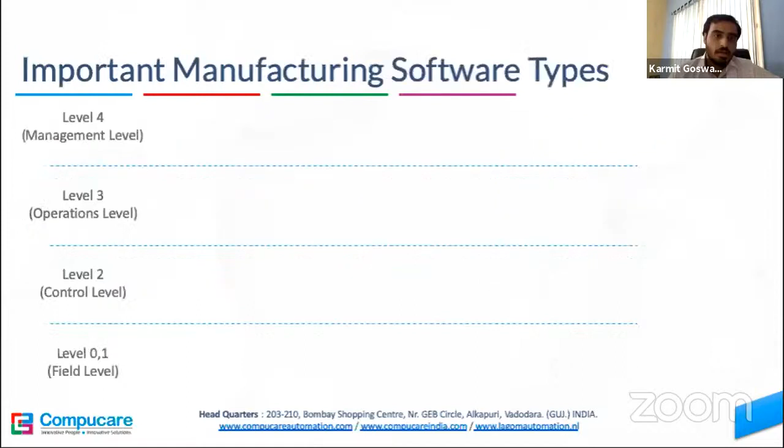If you don't inform your manufacturing plant regarding upcoming orders and stuff like that, the plant cannot meet the targets. Or if there is any new innovation in the market that the plant needs to innovate towards, it's going to be a challenge for the plant. So to take care of this, you have obviously deployed a lot of systems in your plants. I have mentioned a few systems here and divided them into 4 levels.

The bottommost level has your PLCs, controllers, HMIs and stuff like that connected with the machine, as well as some sort of system somewhere sending you the real-time data.

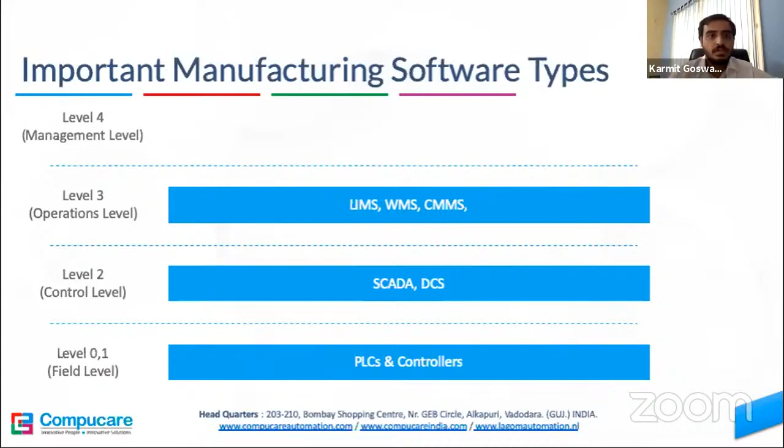The control level. So it goes to the SCADA system. SCADAs and DCS systems take care of all the machines in your plant, and they know the health of each and every machine you have in the plant. Above that, you then have the operations level that is taking care of your inventory, quality, and maintenance parts. And then you have your management levels with your ERPs, CRMs, HRMs, and stuff like that.

So where does a manufacturing execution system fall in this hierarchy? A manufacturing execution system is essentially designed so that it can communicate with the rest of the system. And here's where the manufacturing execution system falls. That is the operations level. So the operations level is generally at the top of a manufacturing plant, and it's directly communicating with ERPs or CRMs and stuff like that to communicate the data to the corporate levels.

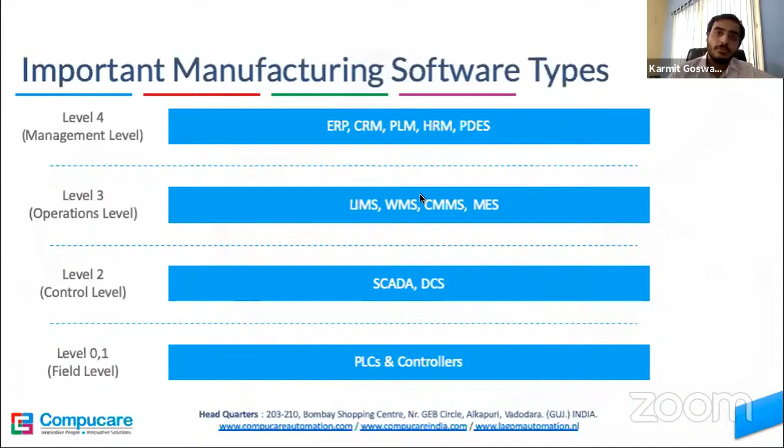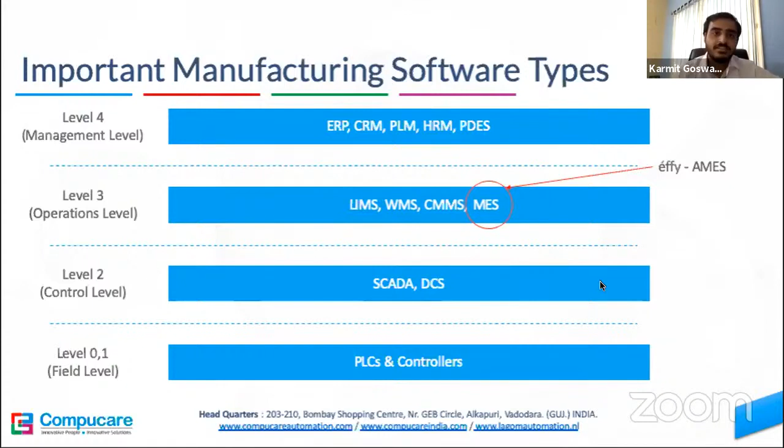So here's where éffy as an MES is designed, or we are innovating over here. And so let me first discuss how an MES is communicating with the rest of the systems in a manufacturing facility. For a fourth level system, a manufacturing execution system communicates with ERPs for production data, with CRMs for tracking and tracing data, PLMs for work instructions, and human resource management software to know what is the performance of their people in terms of production, or how efficiently they are working on the line.

With the sister softwares, I'd say, on the shop floor, on the operations level, the manufacturing execution system has a responsibility to communicate with the quality management systems, that is laboratory information management systems, or inventory systems, that is warehouse management systems, and maintenance systems. So the manufacturing execution system has a very, very important role when it comes to giving you a right picture of your whole manufacturing plant.

And this is what we are already doing, but there's this next thing that comes when it comes to éffy. This is where éffy is differentiated from a regular MES. We communicate directly with the machines on the shop floor. So éffy was designed keeping in mind IIoT. Manufacturing execution systems have been around for over 15 years now, but IIoT is extensively being used since the last 5 to 10 years.

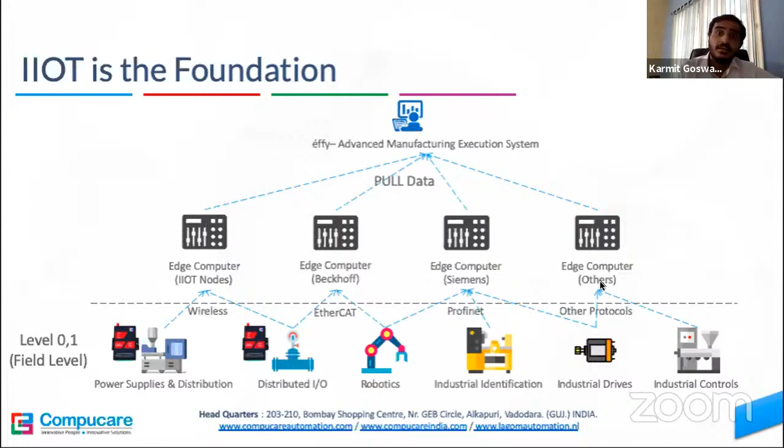And with all this data, it's focusing on one very important factor, and that is improving your OEE, your overall equipment effectiveness. This number, OEE, is based on three foundational blocks: availability, performance, and quality. If you have enough availability of your machines, they are performing at the best level of performance they can, and they are producing products without any rejections, your plant is probably having a very high rate of OEE.

And éffy is improving each of these fundamental blocks by reducing 6 losses. These losses are your unplanned or planned stops on the machines for maintenance or breakdowns and stuff like that, or small stops or slow cycle times. That is your machine idling. Somebody was just taking a break or something, because of which the machine was idling. Or there are a lot of rejections coming out of the machines. These things are being addressed by éffy to improve your OEE, and that's the focus of the whole system over here.

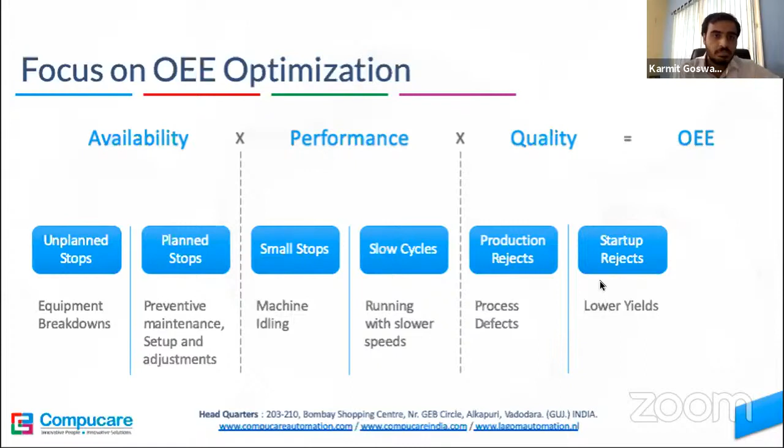Let's see how many modules éffy has to address these fundamental blocks. It is built on 6 pillars. These can function on behalf of other systems that we talked about as well. So for example, there is a production monitoring system, and a maintenance management system, which can work on behalf of a computerized maintenance management system.

The quality management system can work on behalf of laboratory information management system. There's utility monitoring system, product tracking and tracing, which can cater directly to your CRMs, and you have at the end product process digitization. So anything that is going on in terms of paperwork or manual tasks on the shop floor, these can be digitized directly and be communicated directly to and from the corporate houses of your manufacturing plants.

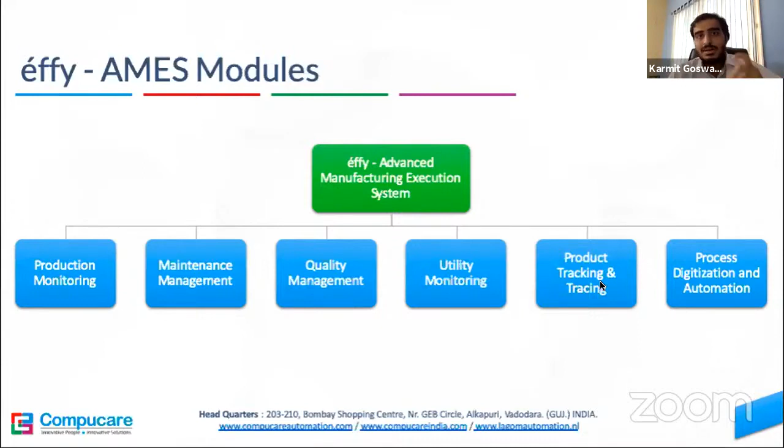So let me show you one by one each of these modules, how they work. So first of all, production monitoring system. It is focusing on 2 major factors, and that is monitoring of whatever production that is being done on the shop floor, and the other part is the order scheduling. So it makes sure that you know what is the targeted production at any given point, and this can be directly transmitted to the workers as well on the shop floor.

They need to know what is the actual production targets. So we can give them as well as the order planner a view of which orders are being executed on time, which targets are not being met in production or something like that, so that they can go ahead and schedule the next orders coming up in the queue, and they know exactly which orders could be delayed at any given point.

In parallel, it also gives the data about machine status and how the machine is performing, and what quality of products it's giving out. So this will indeed help manufacturers improve their OEE percentage. And of course, at the end, waste monitoring.

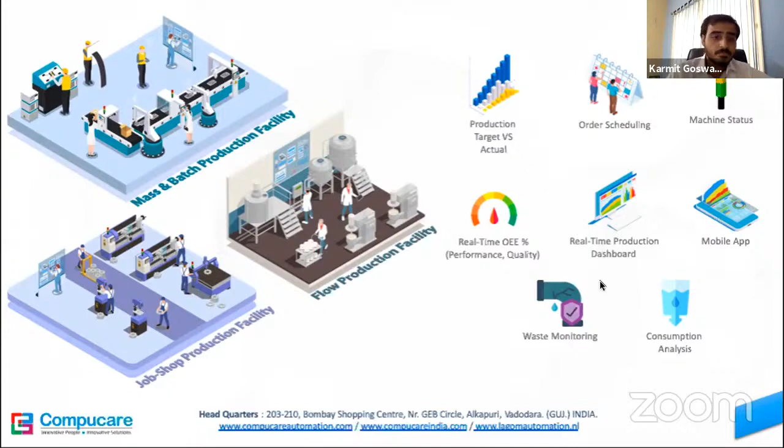Next is maintenance management. It has 3 parts: andon system, condition monitoring, and preventive maintenance. So the andon system and condition monitoring are 2 very interesting parts for machine maintenance. So how does an andon system work? It makes sure that it addresses any maintenance problems or any type of problems. It could be something like the operator does not have material with them on the workstation. This could be a problem that is causing breakdowns or machine stoppages.

So these things that are external to a machine, the machine has no problem, but there are other external factors that are causing the machine not to work. These things can be controlled using an andon system, whereas condition monitoring is keeping a track of everything that is going on inside the machine. It could be something like vibrations are too high, or temperature is too high, or there are slower cycle times due to some stoppages or problems. These things could be taken into consideration using a condition monitor.

And lastly, preventive maintenance. We are working already to implement machine learning technologies for preventive maintenance to make it into predictive maintenance. Right now, we are already communicating with these 2 condition monitors and andon systems to analyze any upcoming breakdowns, and the preventive maintenance system schedules those breakdowns or maintenance routines for you automatically.

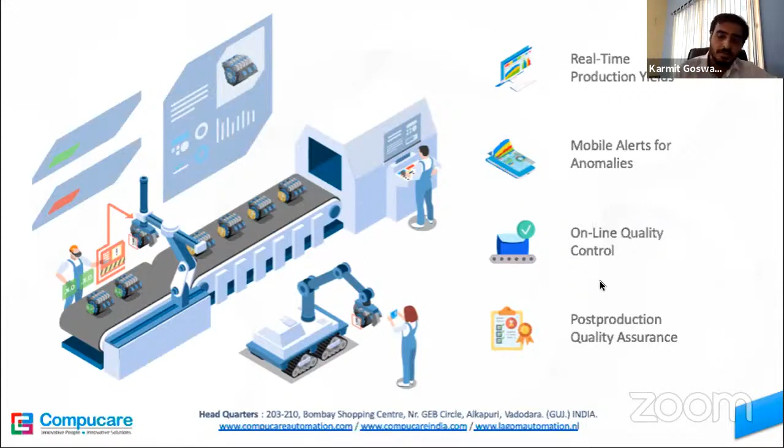Utility monitoring system, I believe you all already know, or you probably have an awareness. The surprising part though is there are over 200, 300 energy meters in a given large or good factory. And there's 1 or 2 engineers employed to get data out of these energy meters. They are simply going around in the factory throughout the day, writing down energy meters data.

So there's one very critical problem that I would like to address over here. That is, isn't this talent being underutilized? That's not their job to collect data like that. So what we are doing is we are communicating directly with the energy meters or any water level indicators or any utilities on your shop floors to get the data.

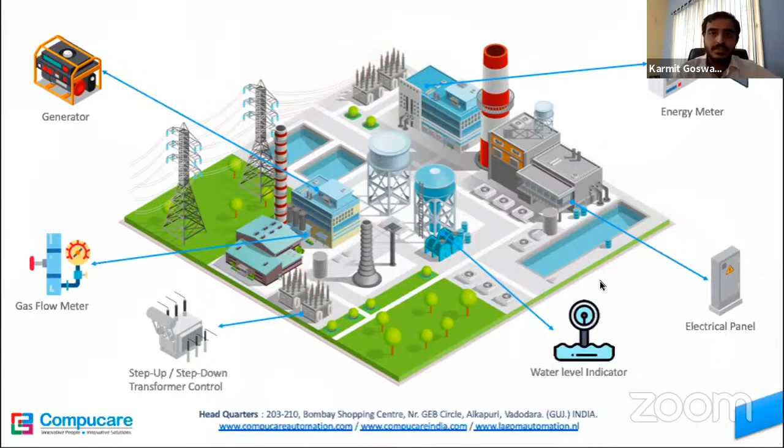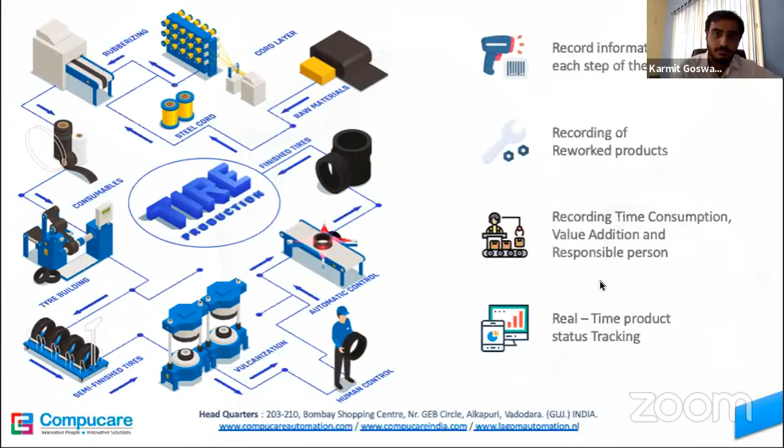And lastly, the process digitization and automation module that we have. This module is basically digitizing everything that is going on on your shop floor. So from a process development execution system, it could get the manufacturing flow data and execute that information to each of the workstations. So workers know, or the inventory system knows, that this material needs to be sent to this particular workstation and stuff like that. These things can be controlled using the process digitization and automation system.